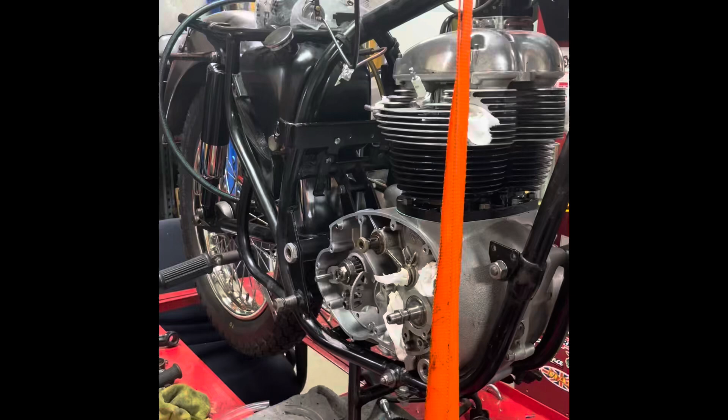All right, back out here on the BSA, still waiting on some parts, but we're going to work on the oiling system here, the lubrication system. Some instructions there for how to do an SRM oil pump from those guys, also got the instructions from SRM, and then we have Ed's instructions from EV Engineering, got off Brit Bike.

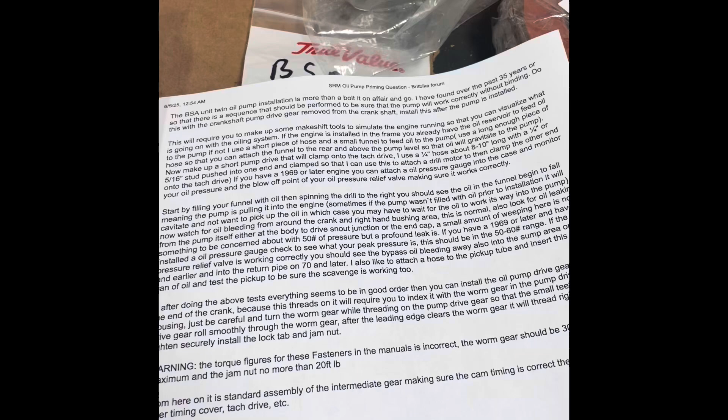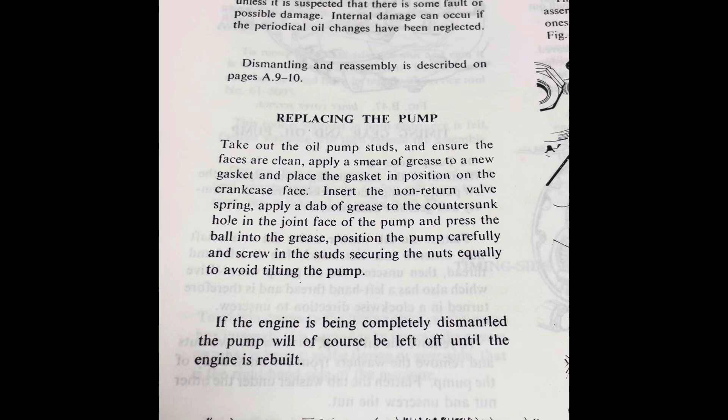And then let's see here. In this manual, it really just talks about when you put the cases back together, replace the pump on B30. B30 basically says grease the gasket and then put a dab of grease to the countersunk hole on the face of the pump. Doesn't really get into priming the oil system.

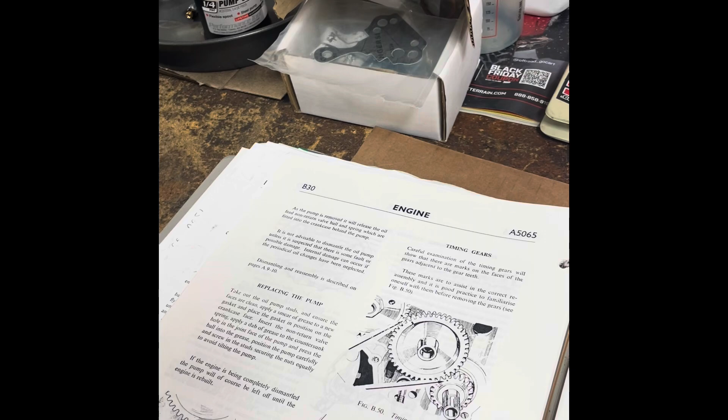It does at the beginning here, changing the oils. It's in the lube section. Here we are in the lubrication section. It does talk about when you remove the sump filter on the bottom, adding a half a pint of clean oil into the timing plug on the front of the engine. That'd be right there. Also shows how the lines are installed. Doing a return filter, so it would be a little bit different than that.

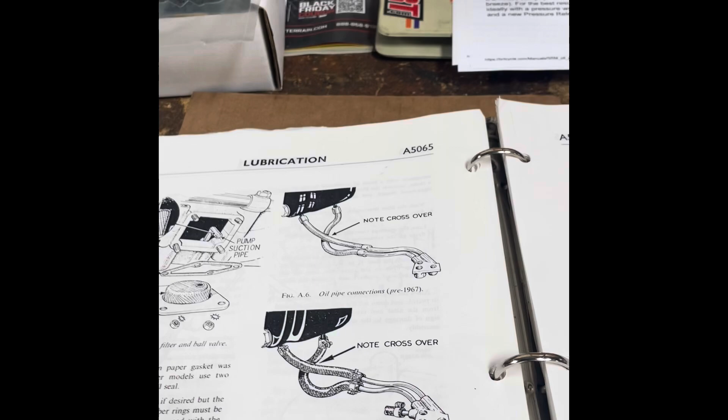All right, let's talk about installing the push rods. I'm not going to get to that yet. I am going to squirt some oil into the rocker supply. I'll come back later and get the push rods in.

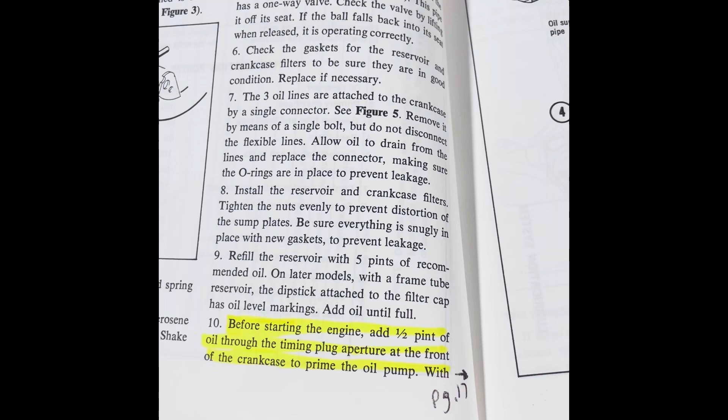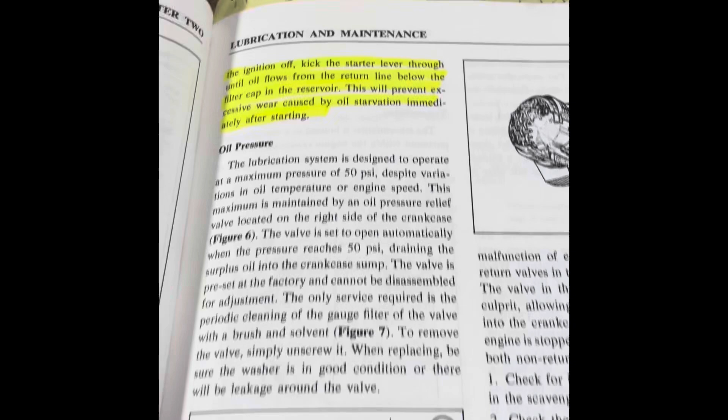All right, the Clymer book also talks about adding a half a pint to the timing plug on the front of the engine. Also, with the ignition off, you kick it through till you get oil flowing from the return line below the reservoir cap. That could take quite a while, but we're gonna do a few different methods here of what I got going.

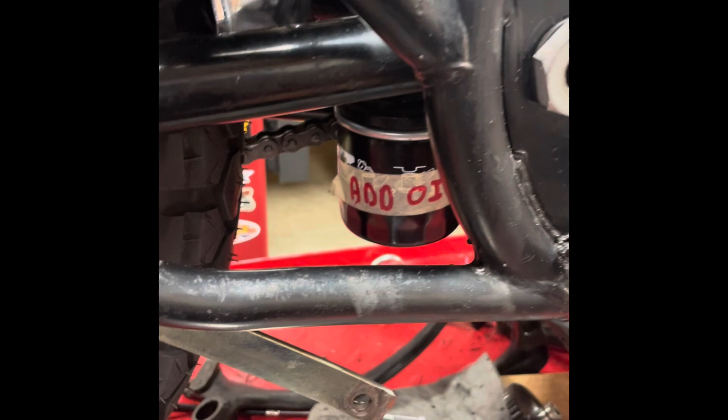I'm gonna get after this oil filter, get that full of oil, get these lines ran, and do the line for the rocker feed right there. This line's cracked. Got a new line, gonna replace the hose too. Oh yeah, I took the sump plate out and pressure regulating valve there's out.

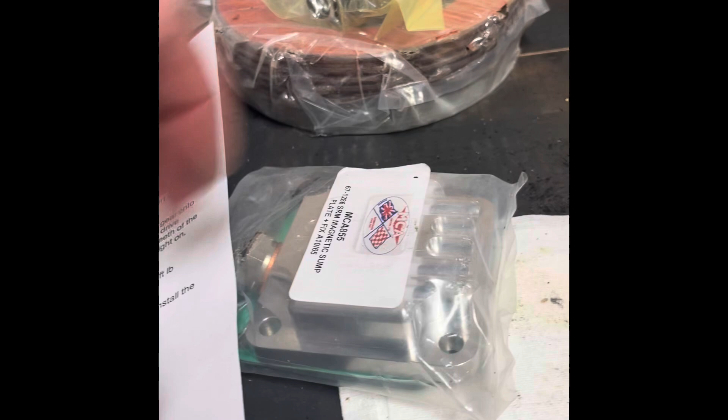I'm gonna pull those studs out real quick. So I'm gonna be running this other SRM. Well, my new used line is obviously much longer.

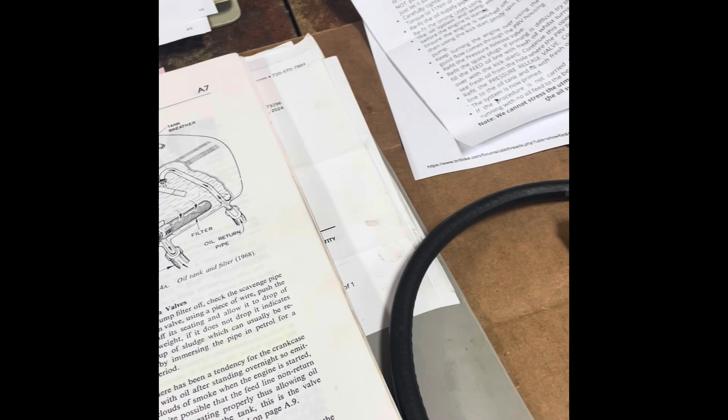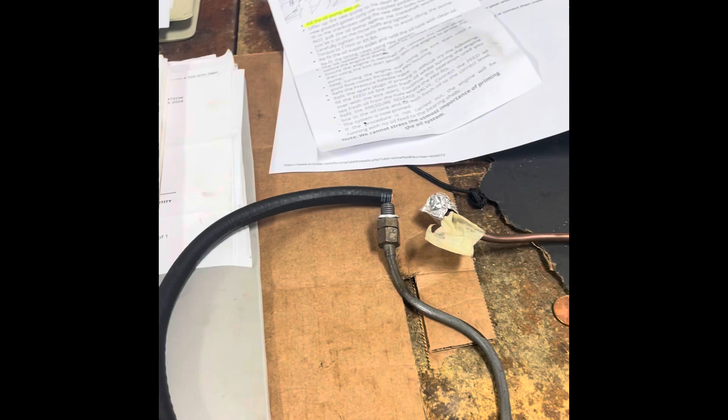There was some differences, like this oil tank, the rocker feed line is up here. I think it was 68 some point. There would be another line down on this piece, and that would feed up to your rockers. So I'm assuming that's where this line came from, was a newer bike. So I'm gonna get that cut down.

I hadn't used this tool in forever. I had to lube that thing up. Didn't even want to move. So I'll get that trimmed down and get her installed. All right, got the new to me line cut and cleaned up. Figured I'd spare you that drama.

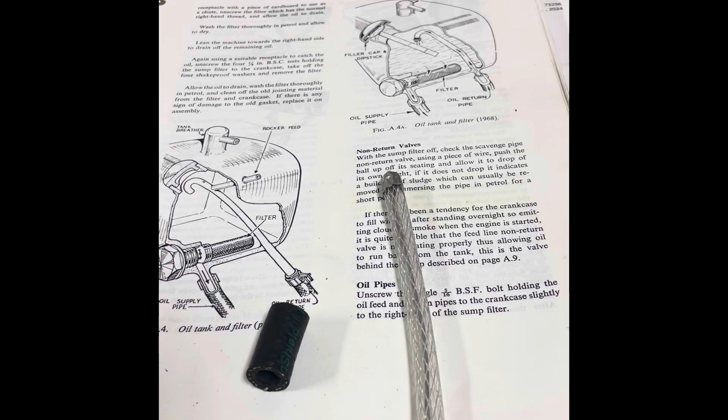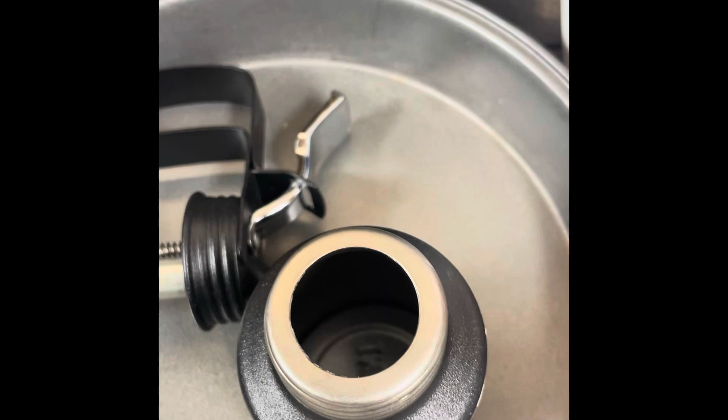Let's get that installed. All right, got our hose cut up for that line. Got this filling hose, another piece of tube here. This is a new pump I got from Advanced Auto. Had this older one, figured to start with a nice new clean one, and it's all clean in there. Gonna put some 2050 in there, and we'll start priming the top end here, the head that is.

All right, got it hooked up there. See it coming out the split pin there.

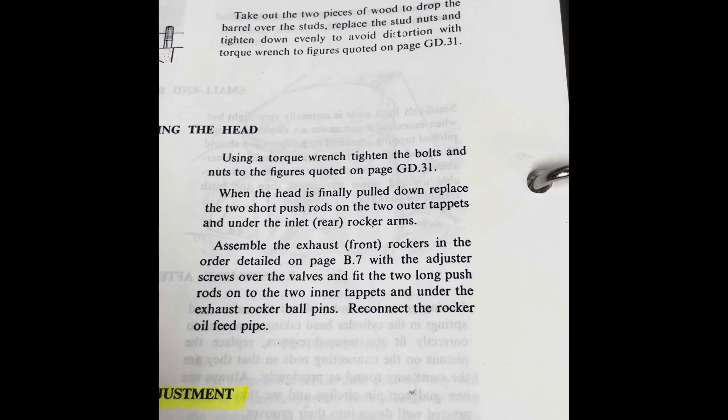All right, so this is when the head is finally pulled down, replace the two short push rods on the two outer tappets under the inlet rear rocker arms. Well, here I grabbed an exhaust one, so I grab the shorter ones here and get those in.

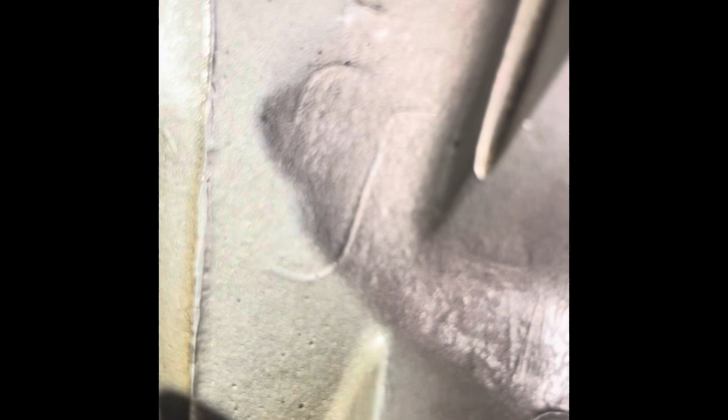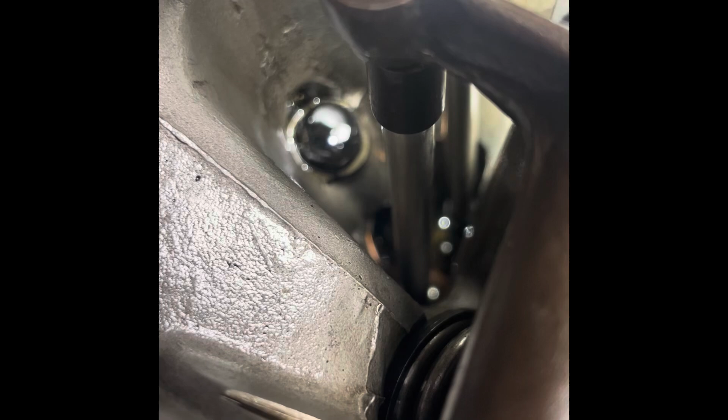All right, not sure how well you'll be able to see this. Anyhow, they are on the outer tappets. Now I'm going to install the exhaust ones on the inner tappets.

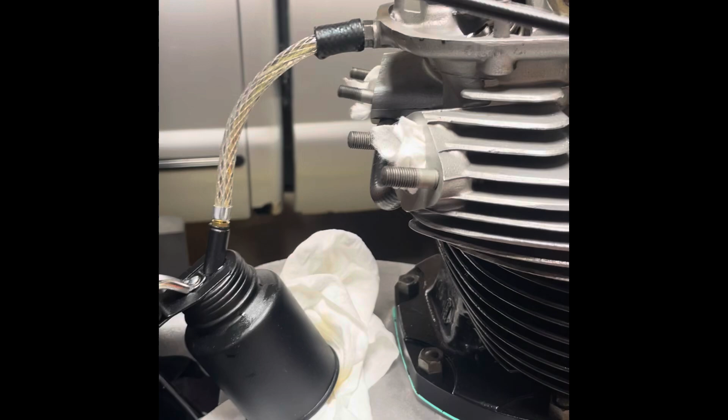I did roll these across the top of the toolbox here, checking for straightness. All right, push rods are in. They're not adjusted. You do adjust them cold, so this is a good time to do that. Knock something off my stool there. But yeah, I'm gonna give her a few pumps here and see what we got. Yeah, you can start seeing oil dripping.

Appears to be just from the left cylinder. All right, starting to get some out of the right intake.

Yeah, I feel like I got that primed up pretty well there. Of course, it's coming down, coming out of the sump plate area. So it works its way down through that tunnel, push rods down to the cam.

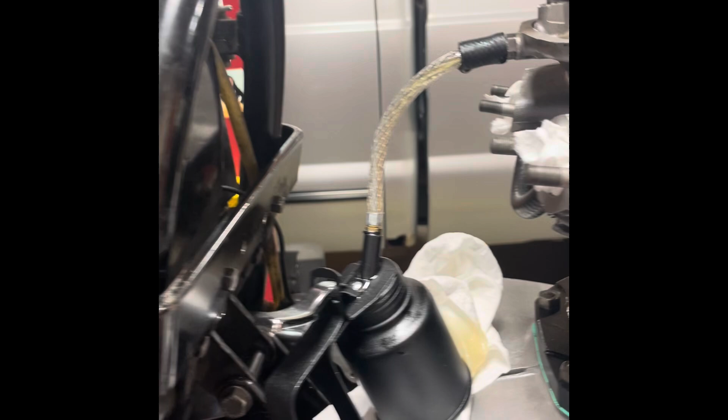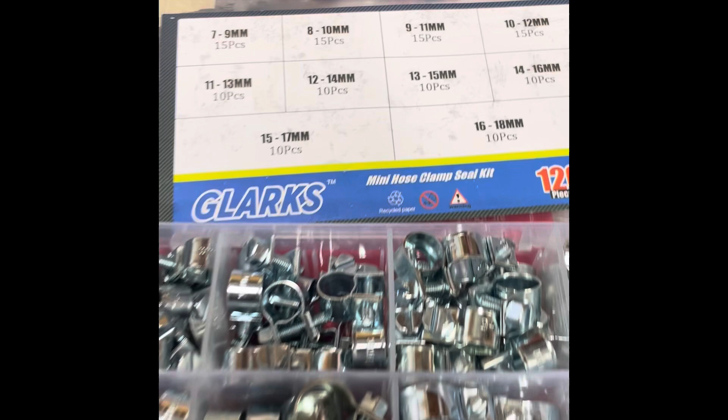So adding oil to the oil filter, stuff we run here. And it's definitely soaking it up. Filter's soaking up quite a bit of oil. I imagine if you're running this kind of setup, doing this after an oil change would be a definite.

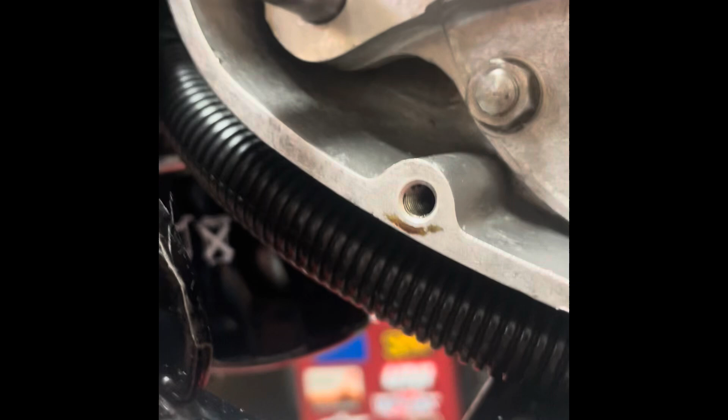All right, real quick, here we are. We got our return. This tube here, closest to the bolt, hooked here, goes up into the filter on the inside. It's kind of hard to tell. This is the in here. This is the out. The other one, obviously, is the out.

Up to return of the tank. And that's, you know, here's the later ones. Here's what we got going on for the 66.

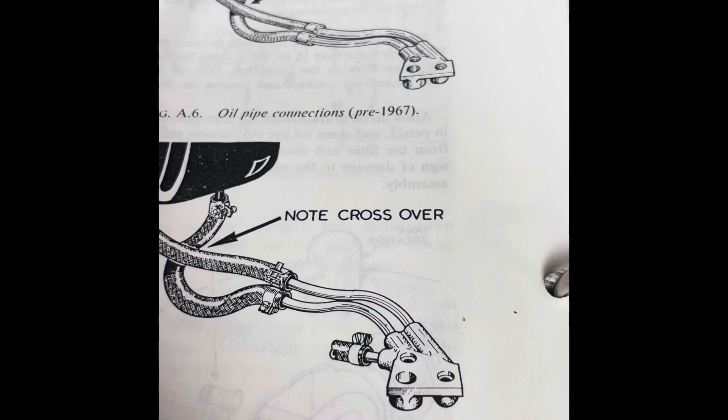So there's your bolt hole. There's your tube. There's where that crossover is to the return. Here's your feed and your filter right here. That's the feed. Still gotta hook the feed up.

All right, back out here on the BSA. Got the oil lines hooked up last night, back from that soccer practice.

I still had the one return line routed differently. I didn't like the bend in the hose. I've routed it this way now. Let's see how that goes. But yeah, let's work on getting this oil pump on.

Oil pump non-return valve spring free length, it's about 20.5 millimeters. And then the ball, we got a measurement for the ball too. It's a 1/4 inch.

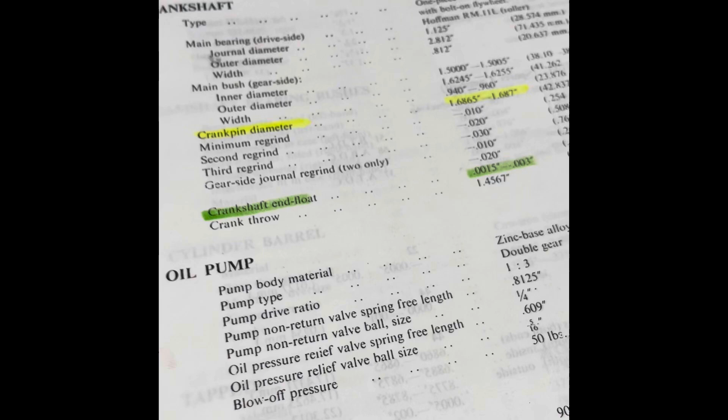All right, now we know we got the right parts. So I get this oil pump out of the bag and get it ready to go on. Oil pump stud nuts are 7 foot-pounds in the book.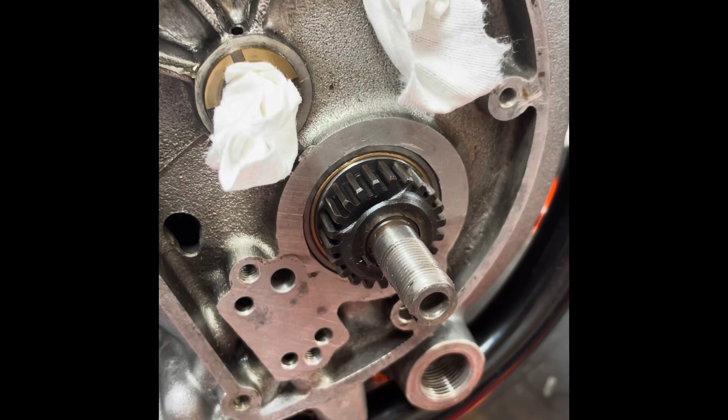SRM paperwork calls for 8 foot-pounds. All right, got our crankshaft gear on there. All right, we got a washer on there. You can kind of see the witness marks from the old pinion on there, so it's on the direction it came off.

So Brit Cycle talks about putting grease on a gasket, so does this old book. The SRM instructions don't, newer book doesn't either. But hey, we'll put a little grease on there because we're going to be putting the grease on the ball.

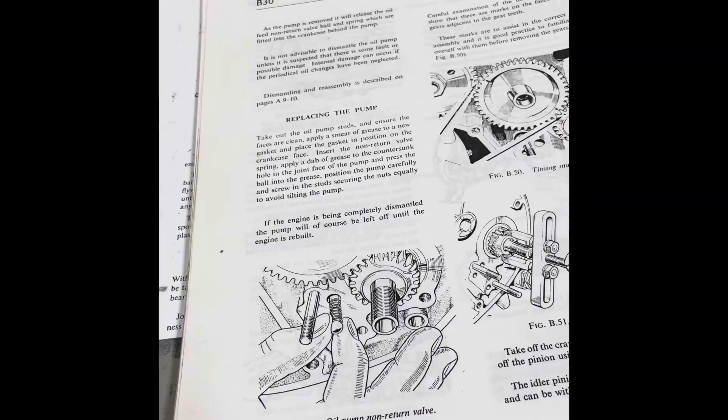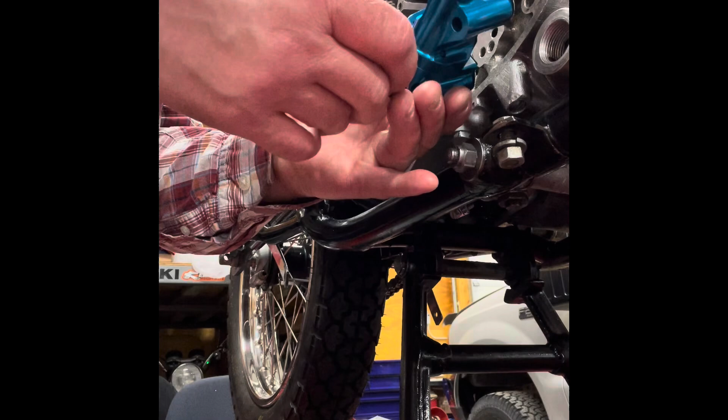All right, got the ball greased up. Slide the spring in. Trickier than it looks.

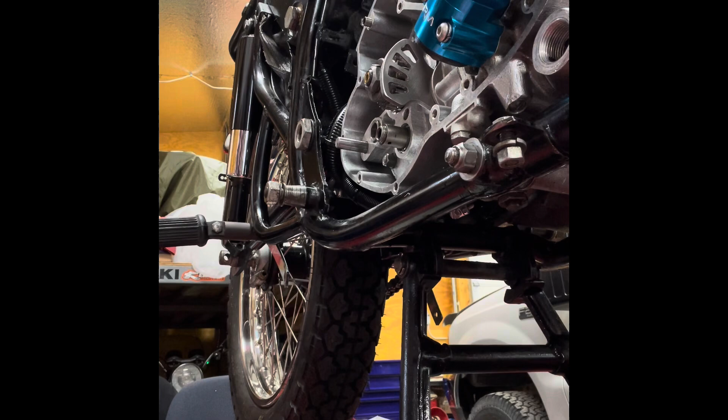Tighten these up evenly. Just got them seated there. And the torque is 8 foot-pounds.

Look at the torque wrench out. Now, Ed's paperwork talks about spinning the end here, piece of hose and a clamp and a drill, turning to the right, which makes sense, the way that going, which way the worm gear would be driven to drive it with the crank spinning, you know, that way.

Yeah, it's moving freely. I'm not going to move it too much. I want to put some oil in the tank first. We're moving a lot, but 96 inch-pounds is 8 foot-pounds.

Don't care for these Allen wrench cap screws. See if maybe a standard fits in there better. I got a 4mm, it just doesn't seem to fit very well. They're the button head style. All right, a 5/32 fits in there a lot better. That was probably on me there.

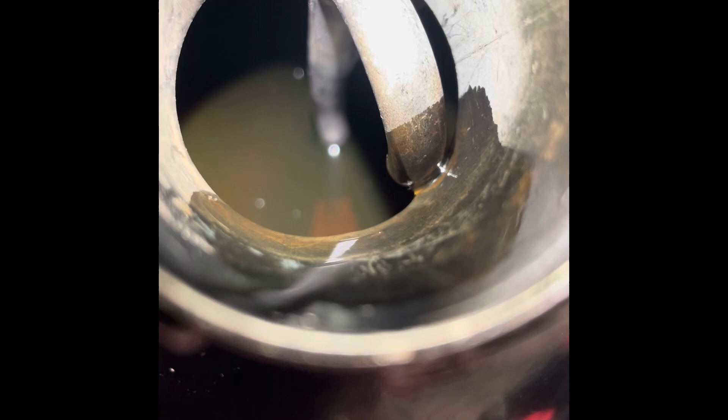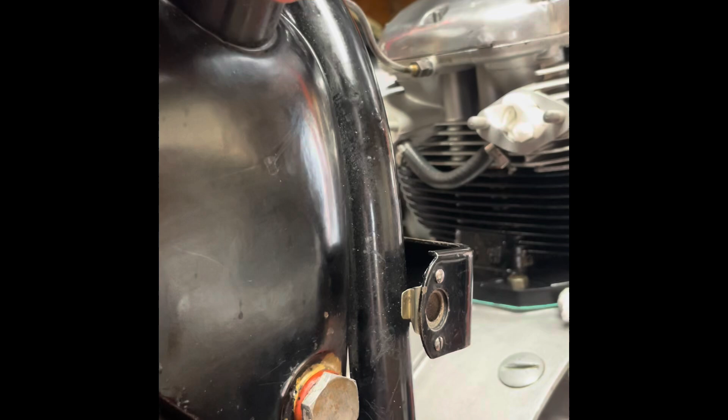All right, got a quart in there. See, it covers the screen at that point. I'll throw another quart on top there. All right, so about exactly 2 quarts in there.

Registers to about low on the stick there. So we'll let gravity do its thing. I'll head inside and grab lunch.

All right, got part of our oil pressure release valve in there, oil pressure regulating valve. Let's pull the piston out.

It's pretty slimy in there. It pushed forward, movement felt good. I'm not going to dig at it. I'm going to put the spring back in, put the cap on there.

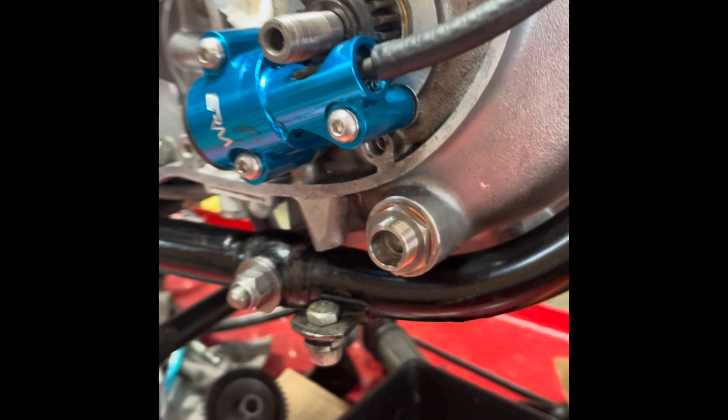Also, got about a 10-inch hose on there on the pump side. All right, got a drill going there. I didn't put any clamps on there. Let's see how it does without clamps. I did get a tube on here.

I put a clamp on that one, and I got half a quart of fresh oil. So I'm gonna give this a whirl, see how this goes. All right, being I've never done this, let's see how this goes.

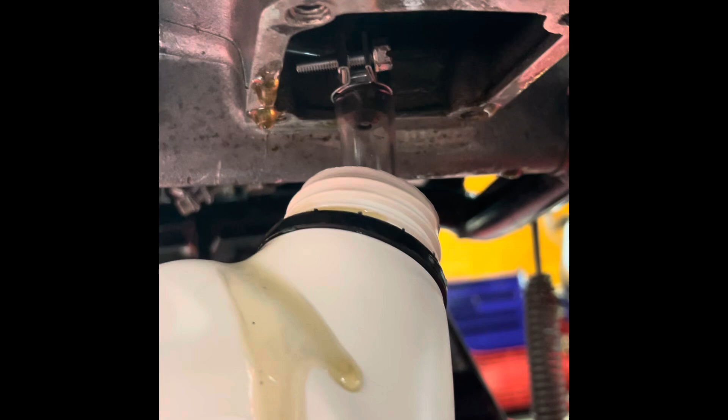Oh, I can see maybe you need clamps. All right, starting to get some oil. It's not pulling any up, but it's definitely running down. Definitely running down. Yeah. Yep, we're getting oil. I'm suspecting my hose may be a little big.

All right, so move the crank so the connecting rod shells are to the bottom here. Gonna spin it up, take a look at the mirror. Pretty sure I could kind of see it dripping already, pretty good. But it's curiosity, get this angled here right. Grab the old drill.

Pretty much you confirm it's getting all the way over to the primary side over there, the bearing shells on the left connecting rod. I'll take that drill off and clean up the bottom here, get the sump plate on.

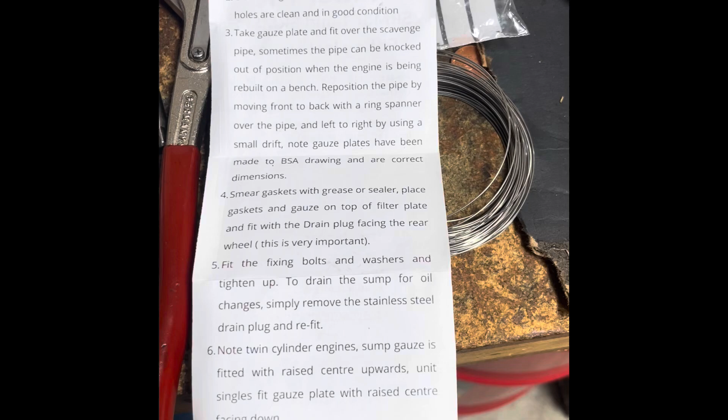All right, real quick, this SRM sump plate. The drain bolt's supposed to face the wheel. Also, on the twin cylinders, sump plate gauze is fitted with a raised center upwards. Singles, it goes down. So you see that profile there, we got that pointed upwards. Also mentions put some grease on the gaskets, so let's get that done and get her on there.

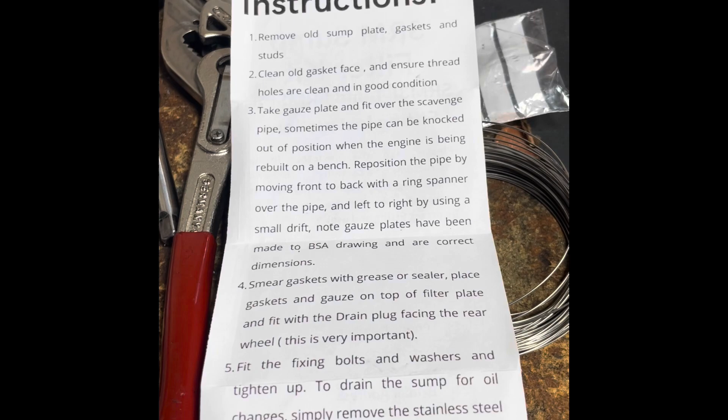All right, greased up, it's ready to go on. It's offset there for the pickup. This is exactly how I'll be installing on the bike over here. This direction.

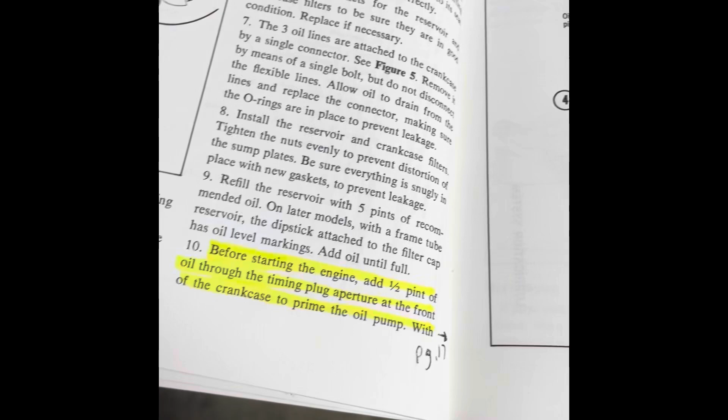All right, the book talks about for oil change, adding that half a pint through the timing plug. We're just going to take, basically it's a quarter of a quart. We're going to dump it down to the push rod hole. It'll get its way down there.

Got the sump plate on, and drain plug facing the rear. All right, worm gear, so service letter says 2830. Ed's paperwork says 30, jam nut 20.

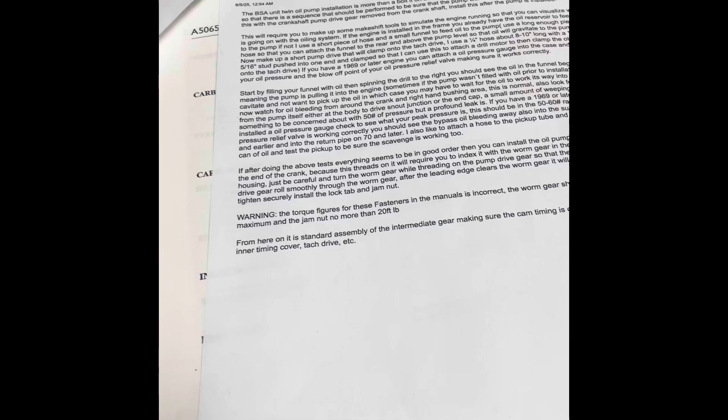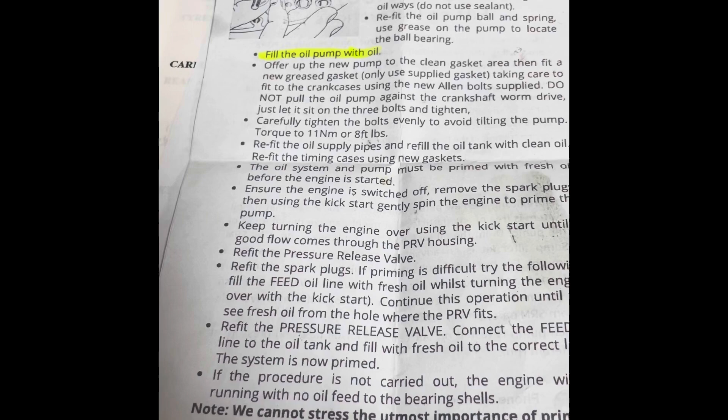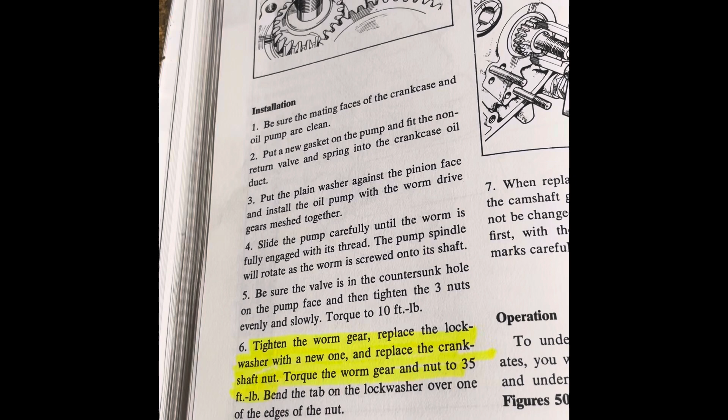These guys' instructions aren't saying nothing. The SRMs are saying, just mentions the housing. Clymer book here, it's calling for torque in the studs 10 foot-pounds. I did 8 earlier. Different pump too, I'm using bolts.

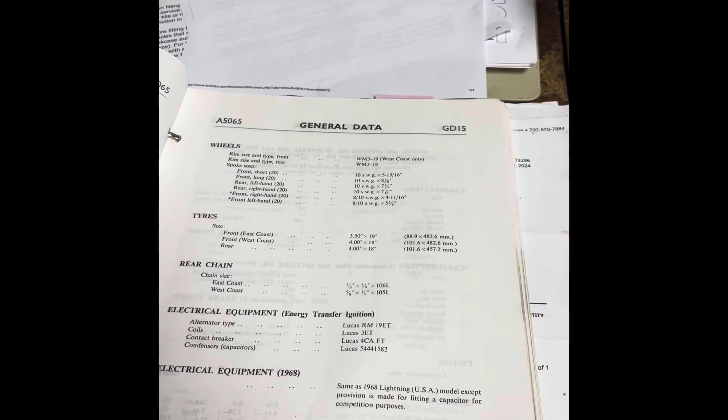Anyhow, they also say in here the worm gear nut to 35. I did 30, like Ed said. I'm going to come back and do 20 on that nut. I already got the worm drive torqued. It's in here too, but it's miscalculated, wrong numbers. Let's see if I find them here.

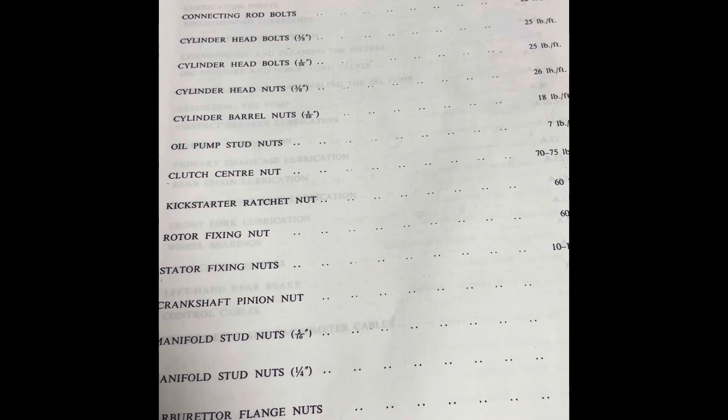Crankshaft pinion nut, there it is. Crankshaft pinion nut, 60 foot-pounds. Yeah, no way, I just put 30 on there and it was a little difficult. 20 will be easier for sure for the jam nut. Follow Ed's instructions. So I guess ordering the whole tab washer kit or lock washer kit for this bike was kind of a goof up on my part.

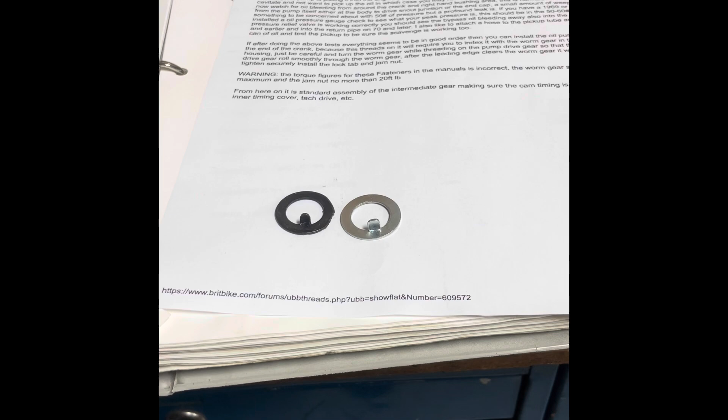But you know, here's the SRM one. Here's what I got. That SRM one won't fit in the crank. I mean, I could trim it. Sure. You know, I could trim it, no problem I guess, but I could also reuse what I got, you know, and be reusing what I got.

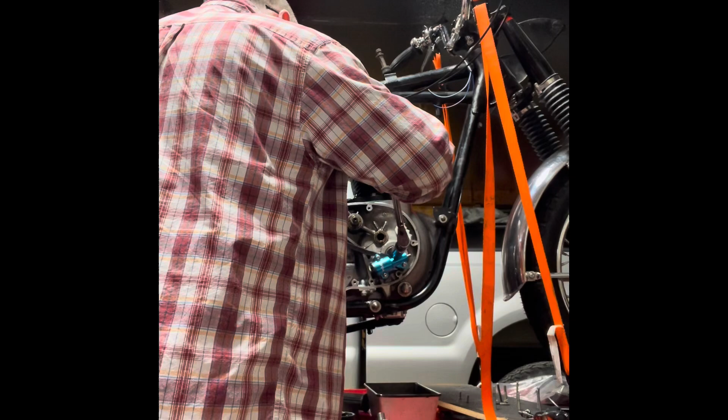All right, 20 foot-pounds. Probably gonna bring a little hate, but whatever. There we go.

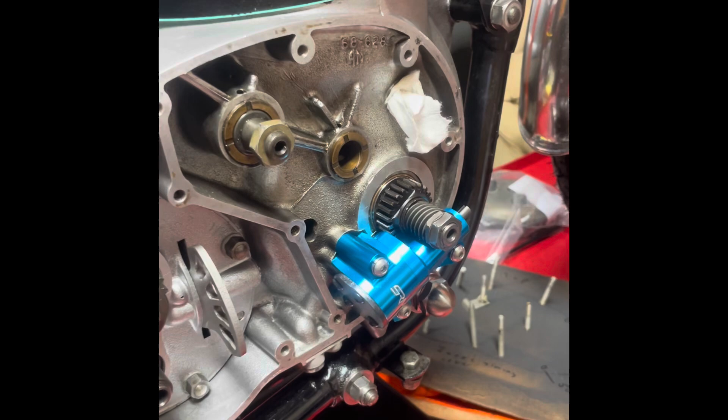I think it's a good stopping point for today. I'll do the gears tomorrow, gear for the cam there, idler gear, and move on to the valves. That's it for today. Oh yeah, got that bent over there, that lock tab.

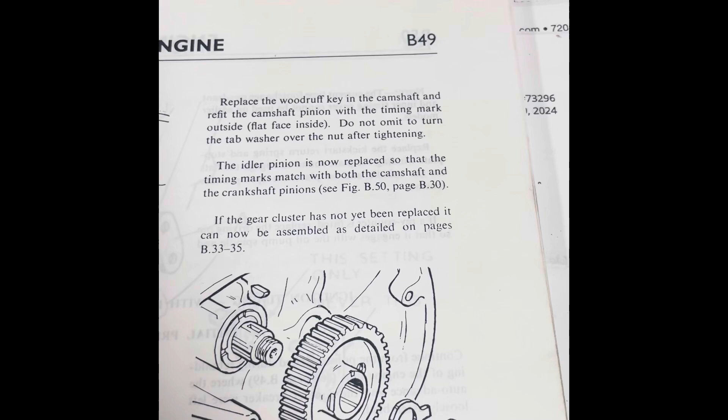All right, ready getting the gears back installed here, the camshaft gear and the idler gear. Talks about tightening them, doesn't give a torque, just says don't forget to bend the tab washer. That's in the old book.

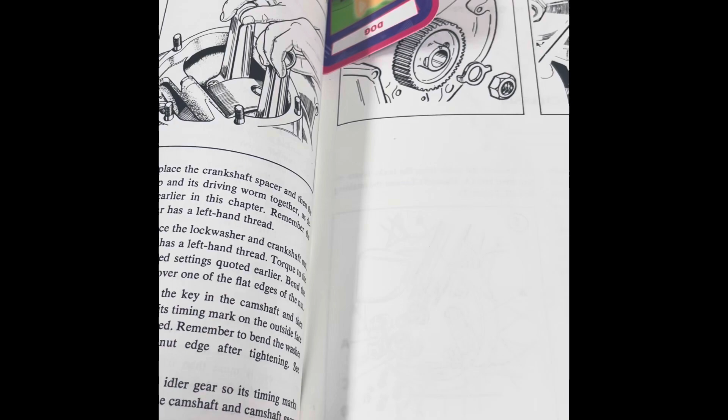Talks about these alignment marks, same thing in the newer book. You know, doesn't give a torque. Talks about idler center gear being the last gear to get installed. Then I looked in the service letter for torques and didn't see nothing there. So we're gonna get it installed and tightened up, and you know, don't forget to bend the lock tab over, right?

All right, we got our Woodruff key installed. Took a minute or two there. Funny how long it takes to get a key in, right? The flush side of the gear goes towards the engine.

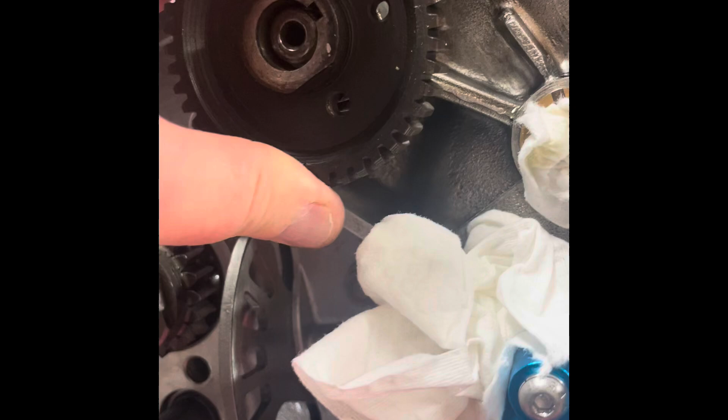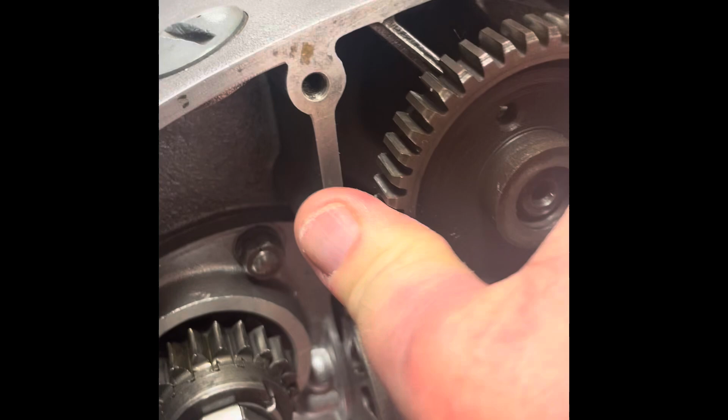Trying to do this one, head is a little bit tricky. I think it started there. Took a little bit to get started there. Still a little stiff. That's home, home James. All right, I'm going to spin this around. Excuse me.

Working on getting that mark close to the spot. I gotta move the crankshaft, get that hole close. I'm gonna do that by rotating the back tire. I got it in gear.

Man, my eyes are not good. I think it's coming up. Yeah, there it is.

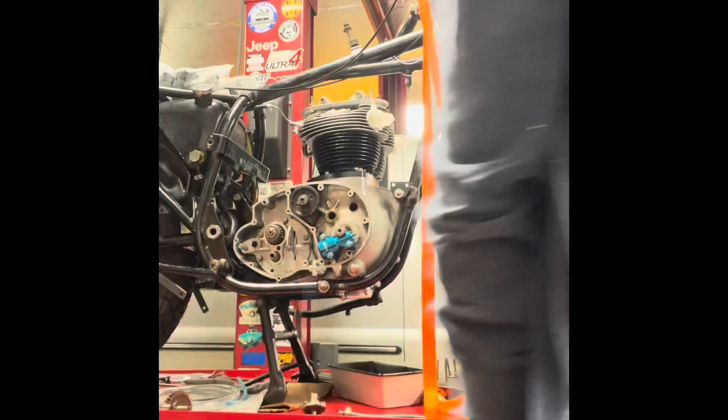I also put some assembly lube. Yeah, there goes the pliers.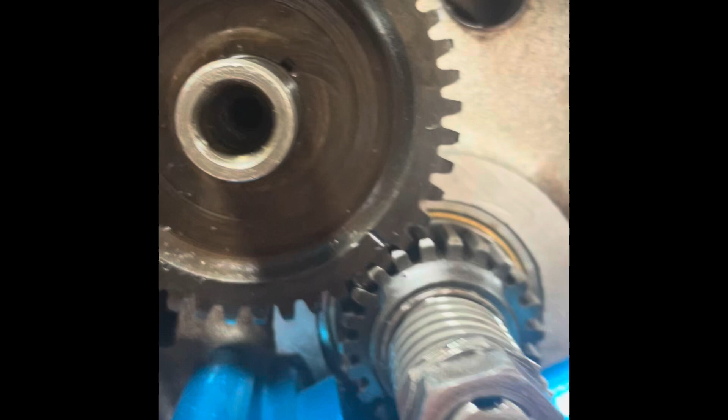All right, so I've moved the gear around. And that was clocking it, you know, one way. Clocked it the other way. That's where it seems to line up best.

Take it out. Clock the other way. I would say that that's it.

And gotta bend this tab over still. So I get that bent over. Well, let me get it tightened first. I'd get ahead of myself. All right, probably another frowned upon method of torquing here.

Yeah, it's about, that flat lines up pretty good right there. Yep.

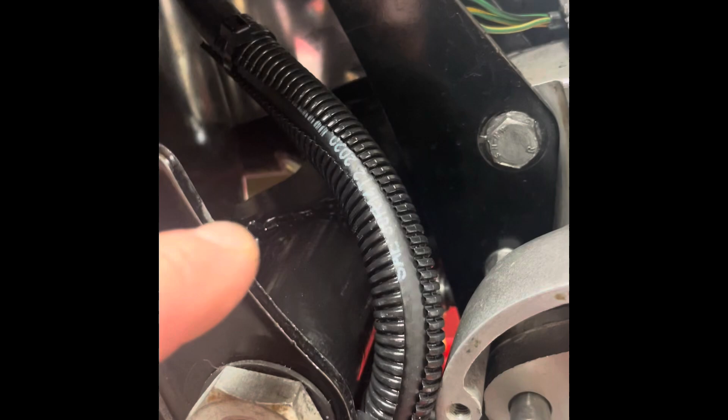All right, no damage to the gears or the penny. Penny even survived that one. It's kind of like when I was doing that oil pump, or not oil pump, the pinion for the oil pump. That bar that was in here went up to hit the frame here. It was kind of a wedging thing, if you will, between here and there, and it wasn't like all on that.

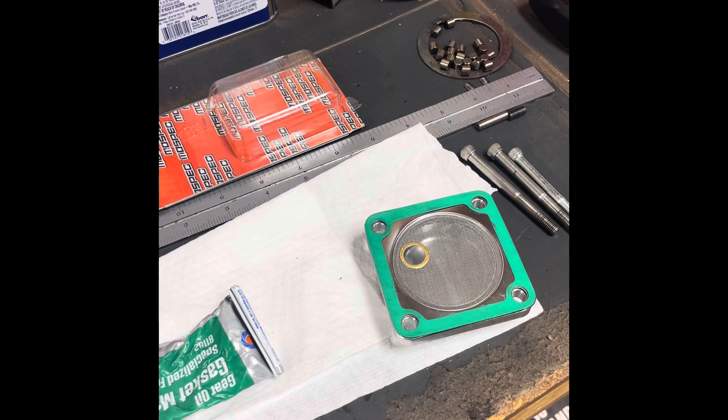All right, gonna give that a dry run. Got some of that, thought about it, gonna pass. Talking about that stuff, also gonna pass. Got some new gaskets, but gonna reuse what I got. Hopefully flattening out that area, took out that defect. I did see guys got some more for sale, but from the pictures, they look like they had a little ripple to them in the pictures he posted online, the ones he's selling, so figure give this a whirl.

All right, for shits and grins, I'm figure what the hell, right? Well, I got that out, that was leaking. Figured I dumped another pint down in through the push rod tunnel and ran it through a few times.

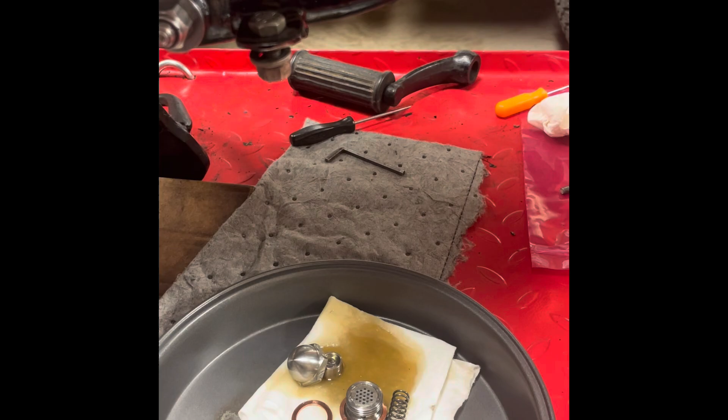And got oil at the pressure relief valve. Gonna button that back up. Oh yeah, that is weeping, seeping, weeping, leaking, or however you want to slice and dice it. Also appear to have one leaking there at the pressure relief valve too. New parts, new gaskets, leaks. Seems about right. So gonna play with that also.

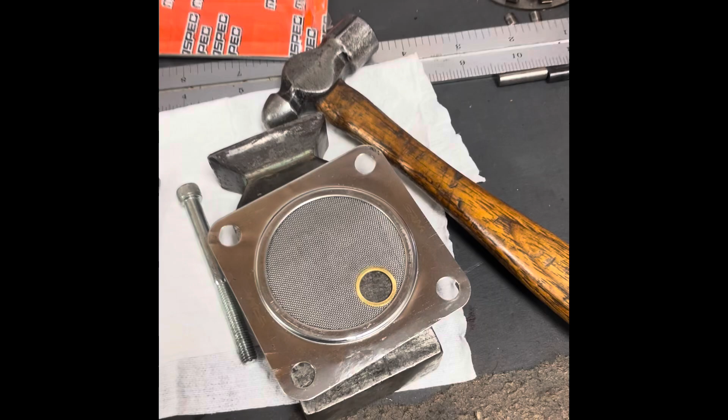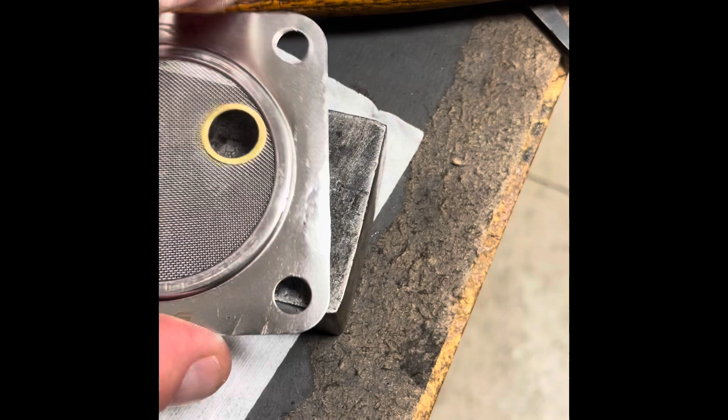All right, so probably not the manufacturer's problem, or defect. I think it happened in shipping or something, but I dollied that out as best I could. Should have showed a before picture. Crimped it with that old bucking bar and a hammer, and I don't know, stick it on there, some grease again.

If it leaks, I'll try the high tack. I bought some more high tack. That'll be my last resort for ordering a new one. Kind of tired of ordering parts and waiting on parts. Kind of like get this thing back together.

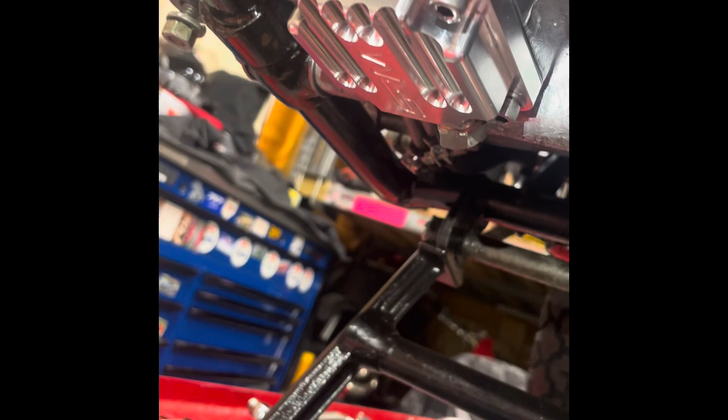All right, back out here Friday morning. Looks like no leaks on this sump plate. Poured a pint down there last night. However, appears to be a leak.

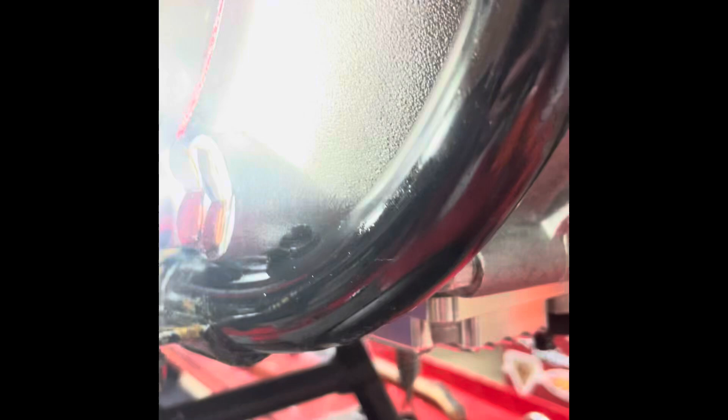This thing appears to be seeping or leaking or whatever you want to call it. Well, I don't think I can really get those any tighter. Pretty tight. Maybe pull them back off and rough them up with some sandpaper maybe. Try reseating them. After that, it's order new gaskets.

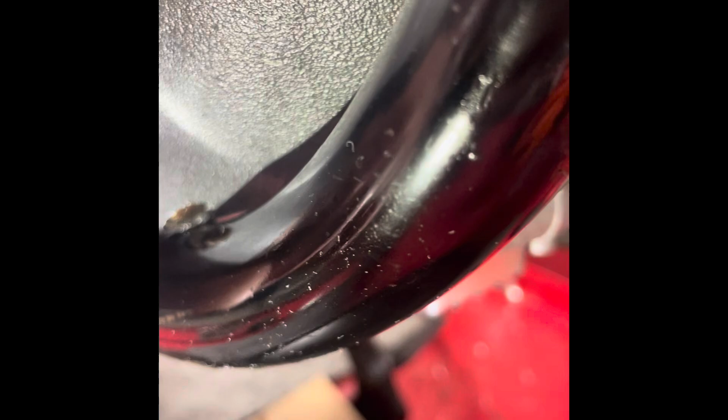We may be okay there. I was seeing a little bit of oil right here in this area. I might have not got that all the way off last night. Cleaned up very well. Yeah, that all appears dry there. And on the bottom here, it's just between here where it's gotten. So I wiped it off pretty good. I don't hit with brake cleaner or nothing.

This is original paint on the bike, not a repaint. But yeah, it definitely shows its age and whatnot, but I don't want to be hitting with a bunch of chemicals. Especially brake cleaner, that stuff can get pretty nasty.

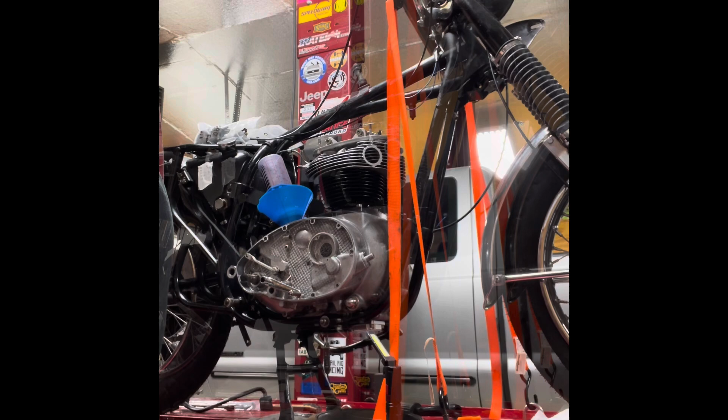Did some studying up on adjusting the valves. I'm going to use the rear wheel to do turn around the motions up here, you know. Push rods and whatnot, and the valves and all that good stuff.